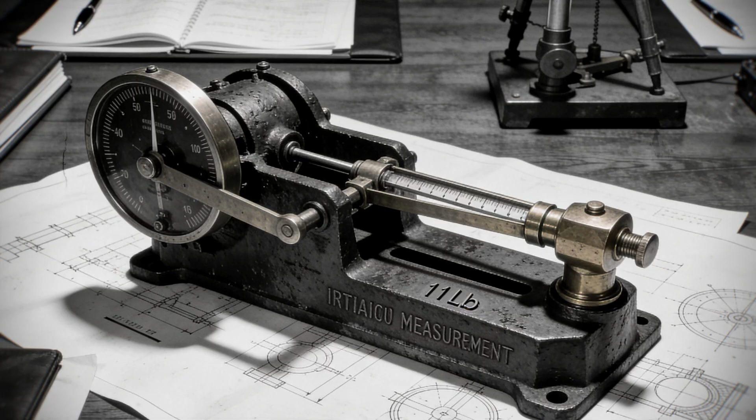The calculation method he presented that day is now codified in the irrigation standards of 14 countries and is taught in every major agricultural engineering program in the world. The device that proved it worked weighed 11 pounds and was made of cast iron and brass.

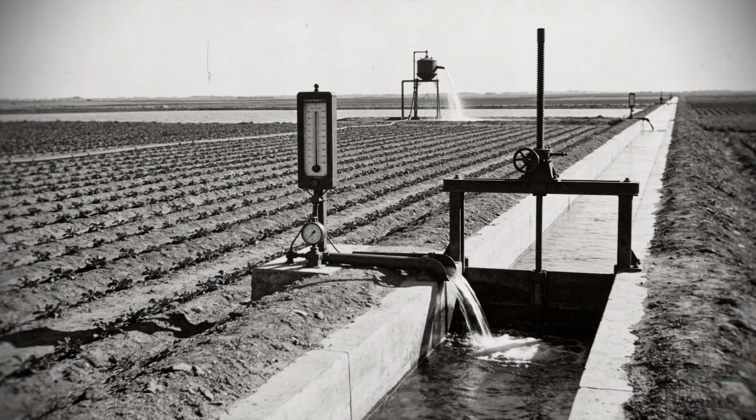Before you can understand why Samuel Rothwell was laughed out of that conference room, you need to understand what irrigation engineers were measuring in 1934 and why every single method they were using was wrong in exactly the same way.

In 1934, gravity-fed irrigation was the primary method of watering large-scale agricultural land across Australia, parts of North America, India, Egypt, and southern Europe. Water flowed from elevated sources through channels and ditches to fields. The engineering challenge was calculating how much water was actually reaching the crops.

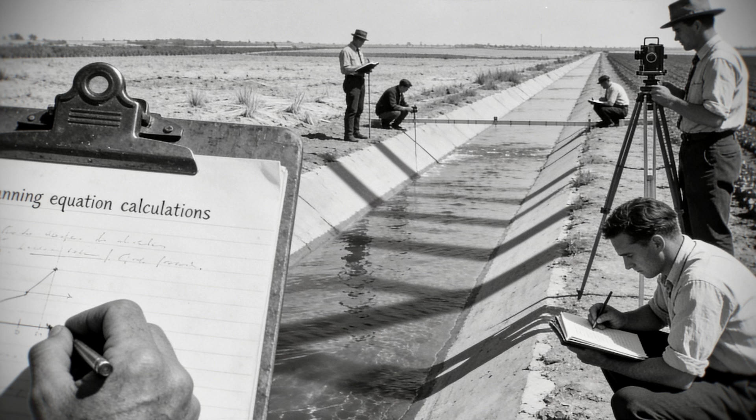Farmers paid for water by volume. Governments needed to know consumption rates to manage reservoir levels. Engineers needed flow data to design new systems. Every calculation depended on knowing the volumetric flow rate through the channels. Get that number wrong and you either flooded fields or starved them. You either overcharged farmers or bankrupted the water authority.

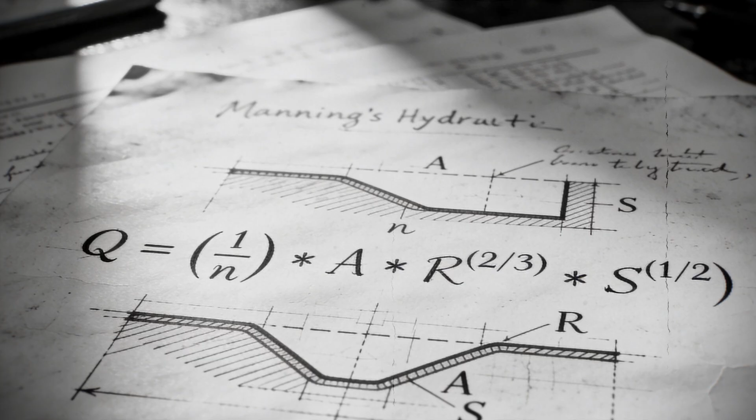The standard method in 1934 was the Manning equation. It had been published in 1889 by Irish engineer Robert Manning. It calculated flow based on channel slope, cross-sectional area, and a roughness coefficient for the channel material.

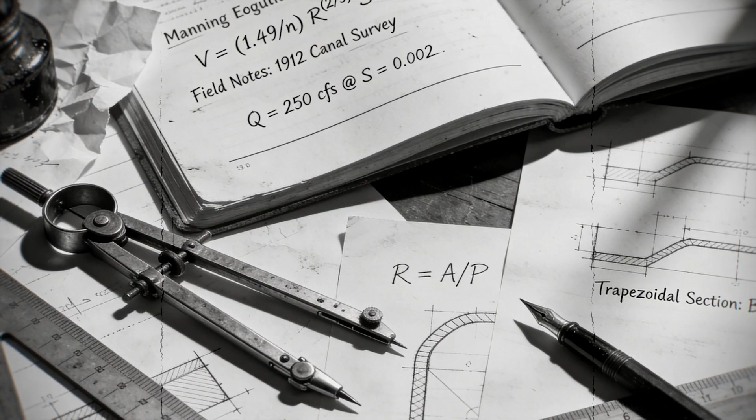The formula was Q equals 1 over N times A times R to the 2/3 power times S to the 1/2 power. Q was flow rate, N was the roughness coefficient, A was cross-sectional area, R was hydraulic radius, S was slope. Every irrigation engineer in the world used it. The formula was printed in every civil engineering handbook published between 1890 and 1940.

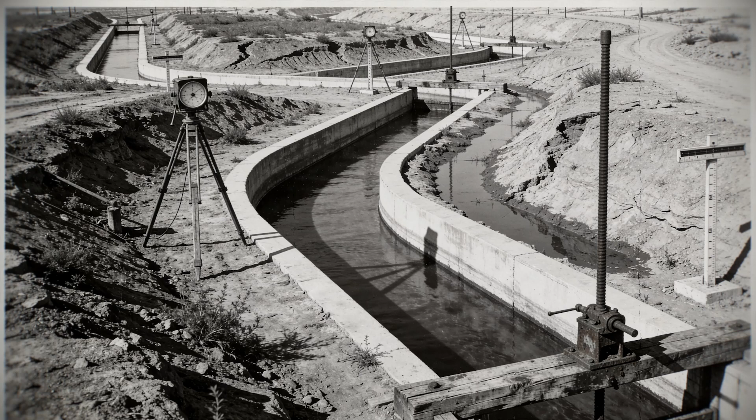The Manning equation had one problem. It was consistently wrong by 18 to 34% in field conditions. Not wrong because the math was bad, wrong because the assumptions it required could not exist in actual irrigation ditches.

Manning's equation assumed uniform flow. It assumed the channel had a consistent cross-section for the entire length being measured. It assumed the slope was constant. It assumed the roughness coefficient was uniform across the wetted surface. It assumed steady-state conditions with no fluctuation in upstream supply. None of those assumptions held in working irrigation systems.

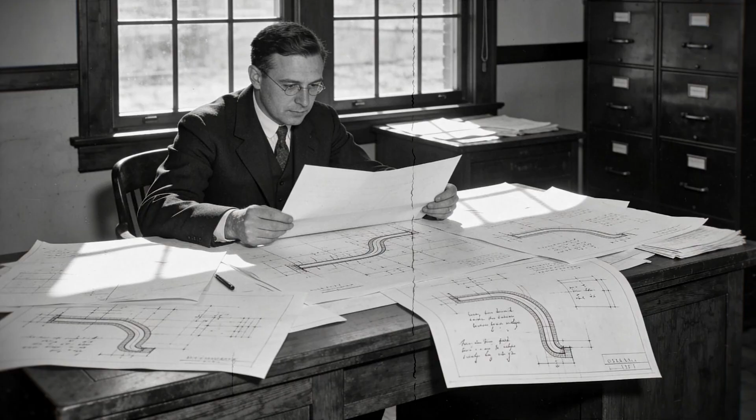Ditches were hand-dug or carved by early machinery. Their cross-sections varied every 20 feet. Slopes shifted wherever the land shifted. Channels accumulated silt in some sections and scoured clean in others. The roughness coefficient changed daily. Upstream flow fluctuated based on demand from other channels. Every single input Manning's equation required was a fiction in the field.

Engineers knew this. They published papers about it. In 1926, C. Ramser at the United States Department of Agriculture published a bulletin titled Flow of Water in Irrigation Channels. He documented measurement errors ranging from 21 to 39% when Manning's equation was applied to working ditches in California and Arizona. In 1929, A.N. Strahler published field data from Egypt showing errors between 15 and 41%.

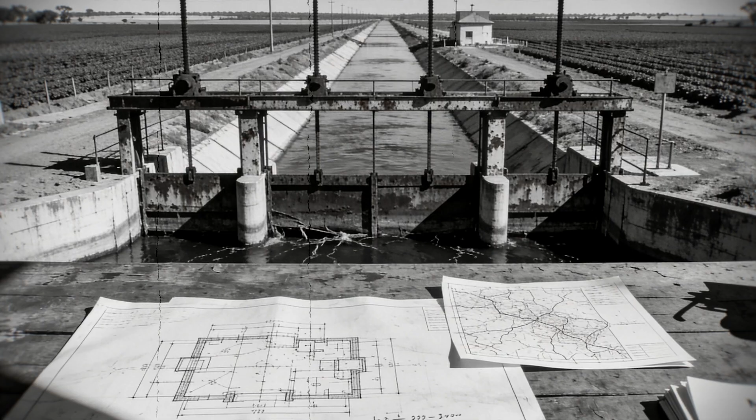In 1931, the Indian Irrigation Commission published a report documenting similar failures across the Punjab canal systems. Everyone knew the equation did not work. They kept using it because no one had an alternative. The consequences were not abstract.

In 1927, the Murrumbidgee Irrigation Area in New South Wales charged farmers for 43,800 acre-feet of water based on Manning calculations. The actual delivered volume, measured at the field level by farmers using their own methods, was later estimated at 31,200 acre-feet. The farmers paid for 12,600 acre-feet they never received. That is 4.1 billion gallons.

At the rate charged, the overbilling totaled 8,240 pounds. Adjusted for the number of farmers affected, the average family was overbilled 47 pounds. For context, the average annual income for a farm family in the Murrumbidgee district in 1927 was 280 pounds. The overbilling represented 16.7% of annual income. Families lost farms over it.

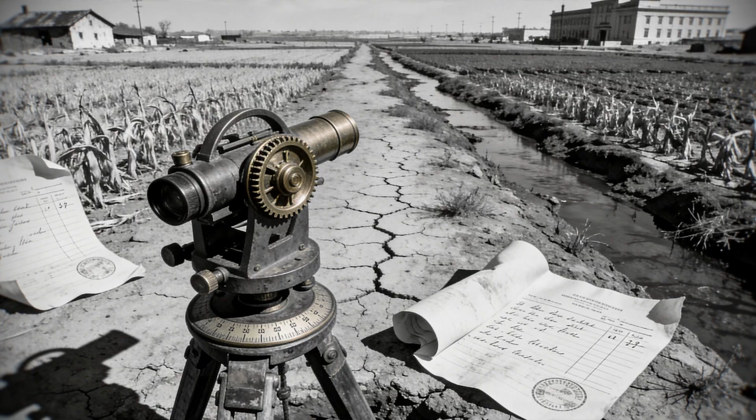In 1930, the West Punjab Canal District in India experienced the opposite problem. Engineers overestimated flow using Manning's equation and allocated water to more fields than the system could supply. During the dry season of 1930, 1,847 farms in the district received less than 60% of contracted water.

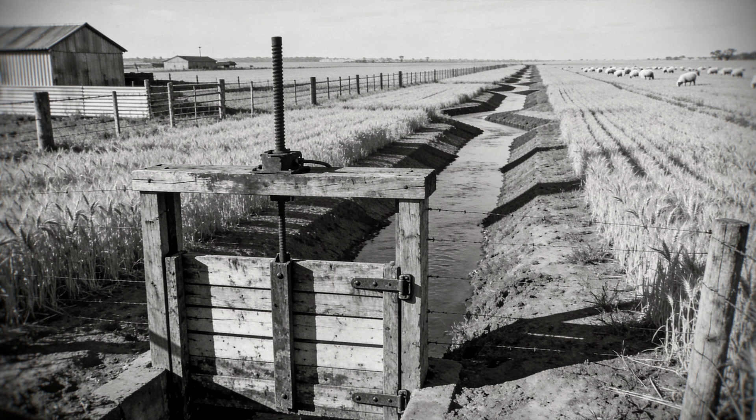Crop yields fell. 412 families defaulted on land revenue. The district administration filed 87 foreclosures. The error was systematic. The flow calculation was wrong at the source.

Samuel Rothwell did not start as an irrigation engineer. He started as a surveyor. He was born in 1893 in Deniliquin, New South Wales. His father, Thomas Rothwell, owned a 640-acre farm growing wheat and grazing sheep. The farm depended on water from the Deniboota irrigation scheme, which drew from the Edwards River.

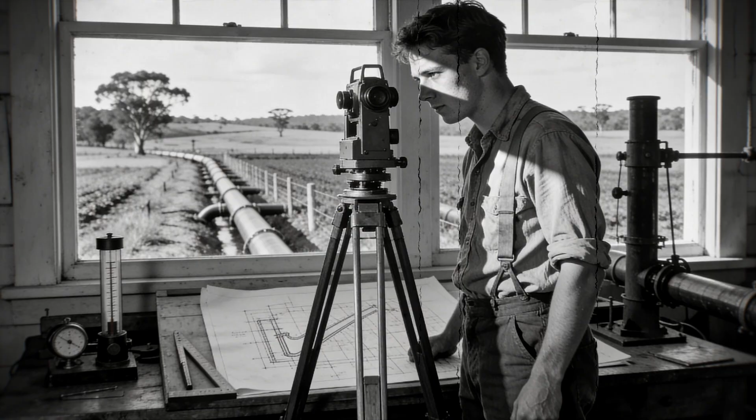In 1911, Thomas Rothwell was billed for 186 acre-feet of water. He had measured his own usage at the field gate using a simple weir box. His measurement said 141 acre-feet. He disputed the bill. The Water Authority refused to adjust. Thomas paid under protest. In 1912, the same thing happened. Billed for 193 acre-feet, measured 138.

Thomas died in 1914. The farm passed to his widow Margaret. She could not manage the land and the water disputes simultaneously. She sold the farm in 1916 for £1,840. The family had owned it since 1878. Samuel Rothwell was 23 years old when his mother lost the farm.

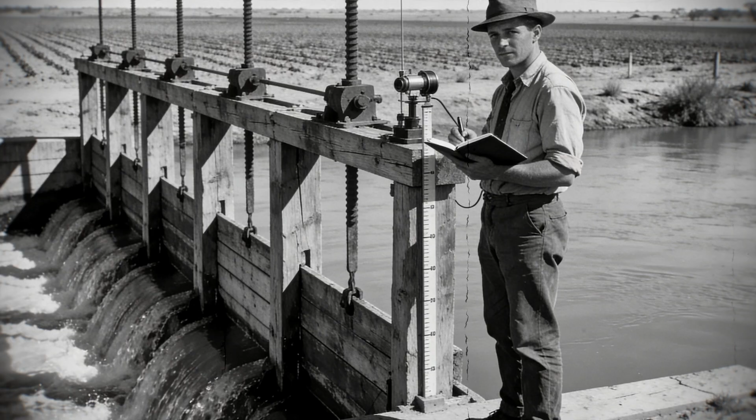He had been working as a survey assistant for the New South Wales Department of Public Works since 1912. In 1916, he requested transfer to the Irrigation Division. His supervisor noted in the personnel file that Rothwell had a personal interest in flow measurement accuracy. He was assigned to the Murray River District in 1917.

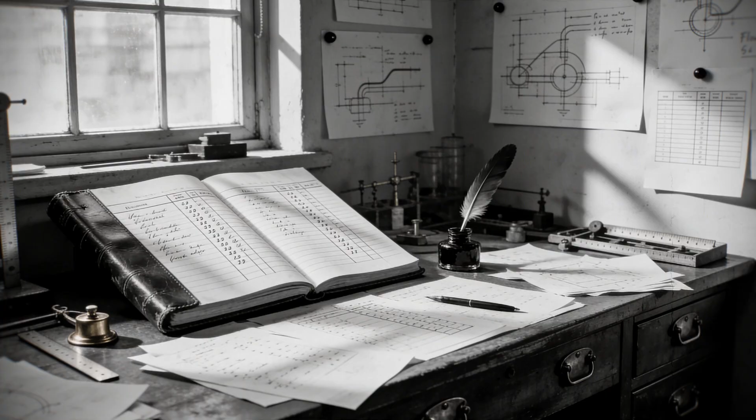Between 1917 and 1933, Samuel Rothwell measured water flow in irrigation channels across the Murray and Murrumbidgee systems. He used Manning's equation because that was the standard. He also used direct volumetric measurement at field gates when farmers requested verification. In every case where he could compare the Manning calculation to direct measurement, the Manning number was higher, not always by the same percentage but always higher.

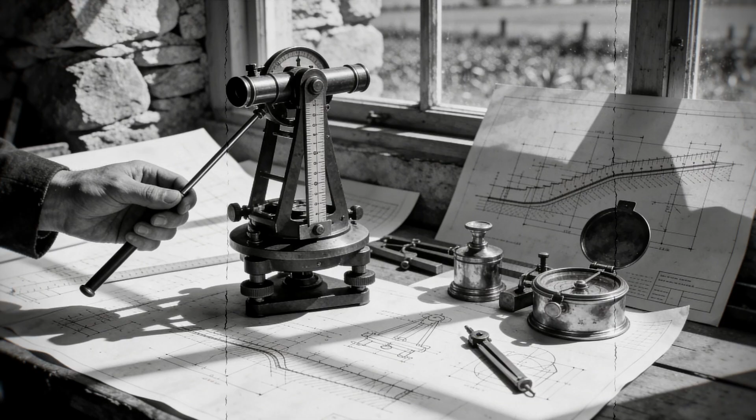Over 16 years he documented 247 comparisons. The average error was 23.6%. Manning's equation consistently overstated flow. In 1931, Rothwell began asking a different question. Manning's equation failed because the assumptions were wrong. What if you measured the thing that violated the assumptions? What if you stopped trying to calculate flow from channel geometry and measured the energy loss directly?

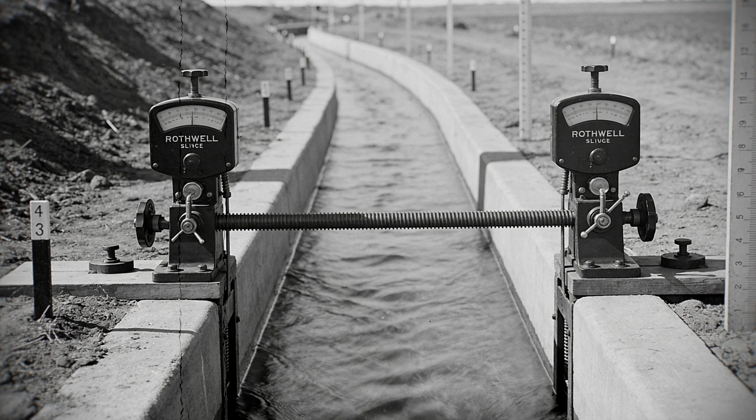Water flowing through a channel loses energy to friction. That energy loss shows up as a drop in water surface elevation. If you measure the elevation at 2 points and know the distance between them, you can calculate the energy loss. If you know the energy loss, you can calculate the flow rate without knowing anything about the channel cross-section, the roughness, or the slope. You only need two numbers, the elevation difference between 2 points and the distance between those points. This is not new physics, it is basic hydraulics.

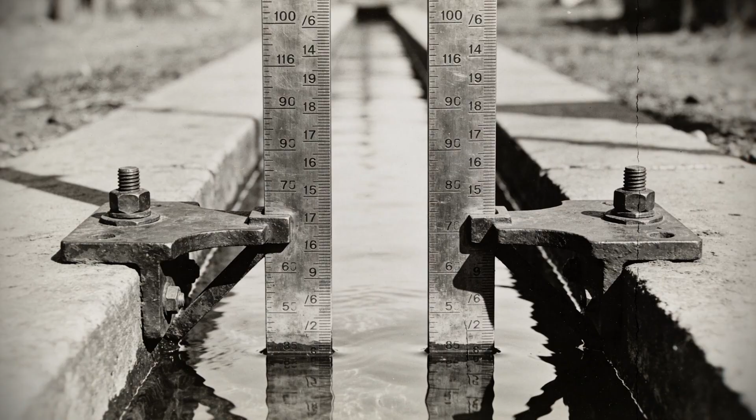Bernoulli published the principle in 1738. What Rothwell realized was that no one had applied it to irrigation channels because everyone assumed you could not measure elevation differences accurately enough in the field. The elevation drop in a working irrigation ditch over a short distance is small. In a channel moving 2 cubic feet per second over a 100-foot length, the elevation drop might be 0.4 inches. Existing surveying methods in 1931 could measure elevation to about 1-inch accuracy under field conditions. That was not precise enough.

Rothwell designed a device he called a paired sluice gauge. It was a set of 2 vertical staff gauges mounted in the channel bed exactly 100 feet apart. Each gauge was a brass rod marked in increments of 1/16 of an inch. The rods were mounted in cast iron bases that were anchored into the channel bottom using expanding bolts. The bases weighed 11 pounds each. The brass rods were 30 inches tall and weighed 14 ounces each. The entire paired set cost £4 and 6 shillings to manufacture.

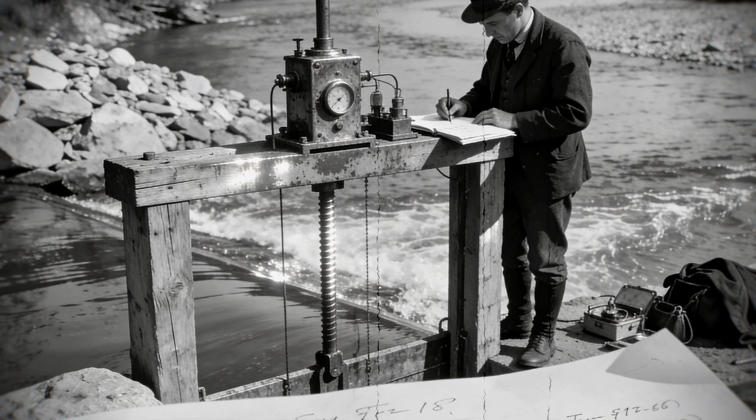The innovation was not the gauge itself. Staff gauges had existed for a century. The innovation was using 2 gauges at a fixed distance and calculating flow from the difference in readings. Rothwell called it the differential energy method. You read the water surface elevation at the upstream gauge. You read it at the downstream gauge. You subtracted. The difference was the head loss. You plugged the head loss and the distance into a formula Rothwell derived from the Darcy-Weisbach equation. The formula gave you flow rate.

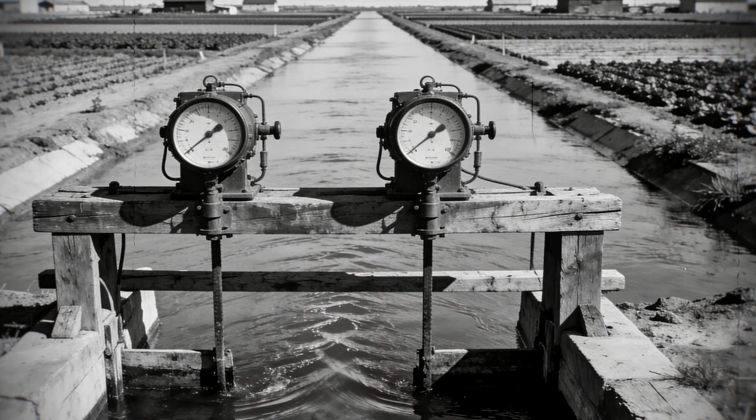You did not need to know the channel cross-section. You did not need to measure slope. You did not need to guess the roughness coefficient. You measured the consequence of all those factors combined, which was the energy loss, and you calculated backward to get flow.

Rothwell installed his first paired gauge set in March 1932 on a supply channel serving the Berriquin Irrigation District. The channel supplied water to 47 farms. The Water Authority had been billing based on Manning calculations. Rothwell installed the gauges and measured flow for 6 months. He compared his measurements to the Manning calculations. The Manning method said the channel was delivering an average of 4.7 cubic feet per second.

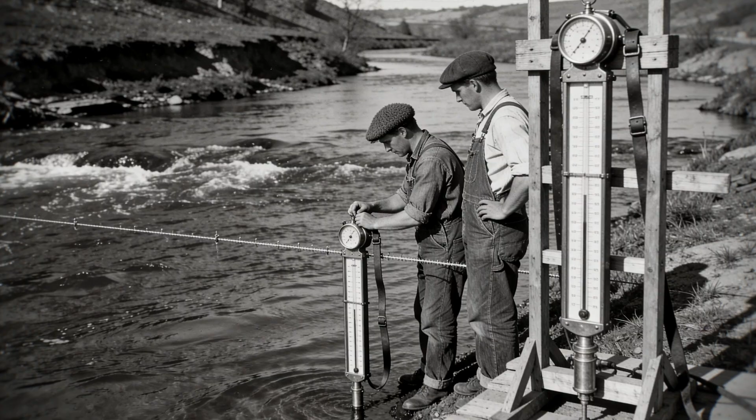Rothwell's differential method said 3.4 cubic feet per second. The farmers had been overbilled by 38%. The Water Authority did not believe him. They sent another engineer, Donald Frame, to verify.

Frame used a current meter which directly measures velocity at multiple points in the cross-section. You measure velocity, measure the cross-sectional area, multiply, and get flow. Current meter measurement is accurate but slow. It took Frame 4 hours to complete one measurement. Rothwell's paired gauge took 2 minutes. Frame's measurement, 3.5 cubic feet per second. Rothwell's method was accurate to within 3%.

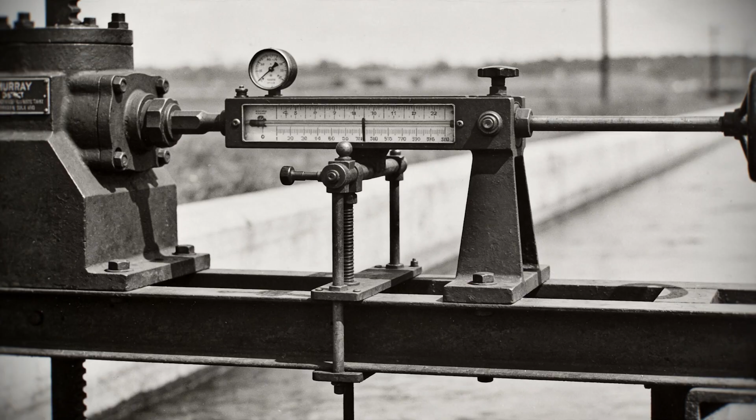Between 1932 and 1934, Rothwell installed paired sluice gauges on 19 channels across the Murray District. He published his results in the Internal Engineering Bulletin of the New South Wales Department of Public Works in December 1933. The report was 11 pages. It included methodology, installation instructions, cost comparisons, and accuracy data from all 19 installations.

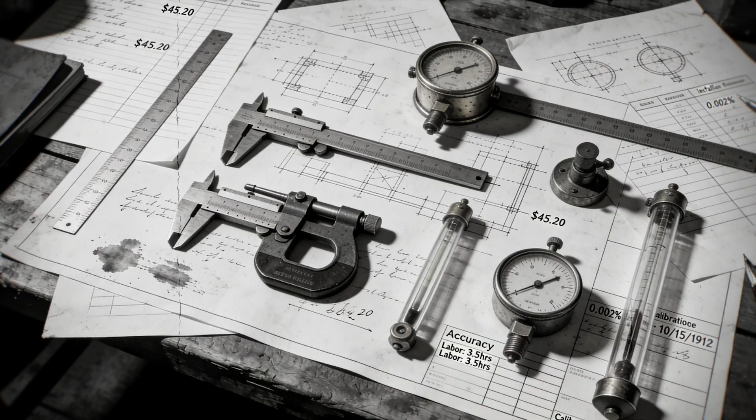The report concluded that the differential energy method was faster, cheaper, and more accurate than Manning calculations or current meter measurement. The cost per installation was £4 6 shillings. The time to take a reading was under 3 minutes. The accuracy compared to current meter measurement averaged 4.2% error. The report was read by engineers in the New South Wales Department. It was not read outside New South Wales.

In January 1934, the Commonwealth Agricultural Engineering Conference announced it would be held in Melbourne in April. The conference was organized by the Council for Scientific and Industrial Research, the predecessor to CSIRO. The purpose was to share research on agricultural water management across British Commonwealth nations. Delegates were invited from Australia, New Zealand, India, South Africa, Southern Rhodesia, Kenya, Canada, and the United Kingdom. The conference organizers invited submissions on irrigation efficiency, soil moisture measurement, and drainage engineering.

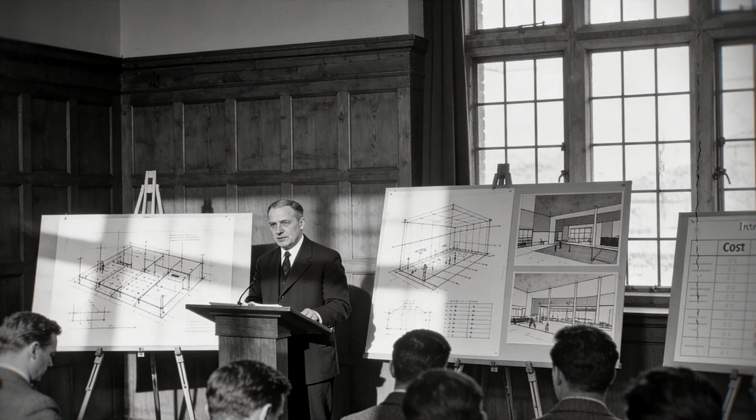Samuel Rothwell submitted his paper on the paired sluice gauge method in February 1934. The submission was accepted. He was assigned to Session 4, Agricultural Water Measurement, on the second day of the conference. He prepared a 20-minute presentation. He brought installation drawings, cost data, and accuracy comparisons. He did not bring a physical gauge. He later told a colleague he assumed the method would be evaluated on the data, not the device.

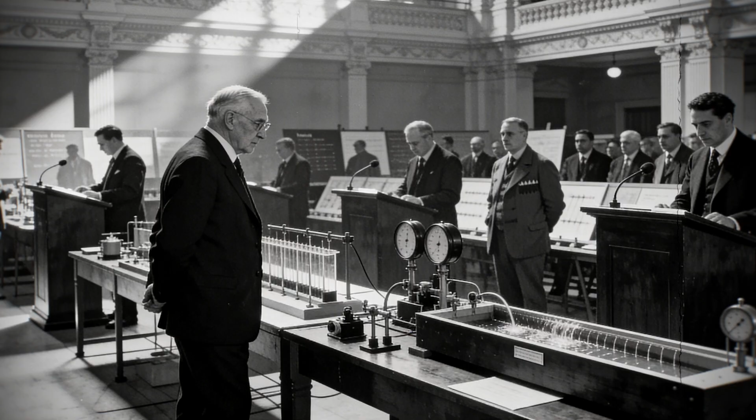The conference began on April 11, 1934. Session 4 started at 1:00 p.m. on April 12. There were 14 presentations scheduled. Rothwell was number 11. The session chair was Sir William Hudson, who was the chief engineer of the New South Wales Department of Public Works and would later become the chief engineer of the Snowy Mountains Scheme. Hudson was 52 years old. He had degrees from University of Sydney and had studied under Osborne Reynolds at Manchester. He was the most senior irrigation engineer in Australia.

The first 10 presentations in Session 4 covered Manning equation refinements, current meter calibration, flume design, and sediment transport. Presenters came from universities and government departments in India, South Africa, and Australia. Every presentation assumed Manning's equation was the foundation. The discussions were about improving input accuracy, not replacing the method.

Samuel Rothwell stood up at 2:43 p.m. He was introduced by Hudson as an engineer from the Murray District presenting on flow measurement. Rothwell began by describing the paired sluice gauge installation. He explained the differential energy principle. He presented his accuracy data. Then he said that Manning's equation should be abandoned for irrigation billing purposes because it was systematically inaccurate and his method was faster and cheaper.

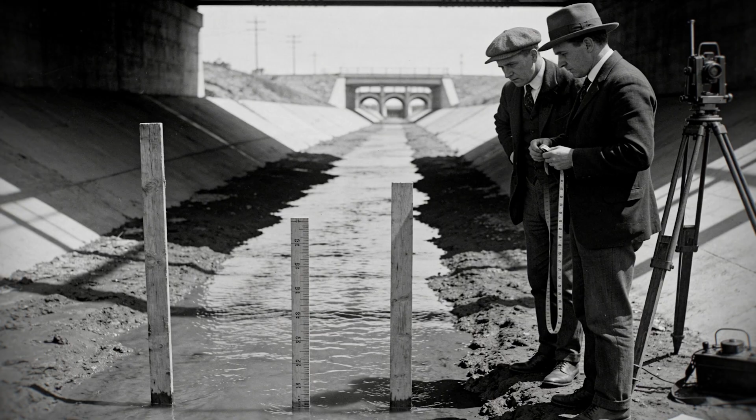The room went silent for approximately 5 seconds. Then someone in the third row laughed. Then others joined. Rothwell stopped talking. Hudson asked if Rothwell was seriously suggesting that 45 years of irrigation engineering based on Manning's work should be discarded in favor of 2 sticks in the mud measured with a tape. Rothwell said yes, if the 2 sticks gave the right answer and Manning did not.

Hudson asked if Rothwell understood that his method ignored channel geometry entirely. Rothwell said that was the point. Channel geometry could not be measured accurately enough to matter, so stop measuring it, measure the result instead.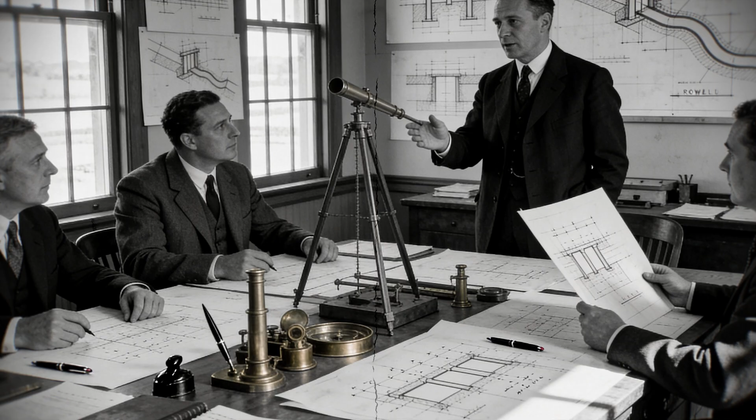A delegate from the Indian Irrigation Service, whose name was recorded in the minutes as Mr. S.L. Malhotra, asked how Rothwell proposed to calculate flow in channels where sluice gates or other structures created backwater effects that invalidated the assumption of uniform energy gradient. Rothwell said you install the gauges far enough away from structures that the flow stabilizes. Malhotra said that could be hundreds of feet.

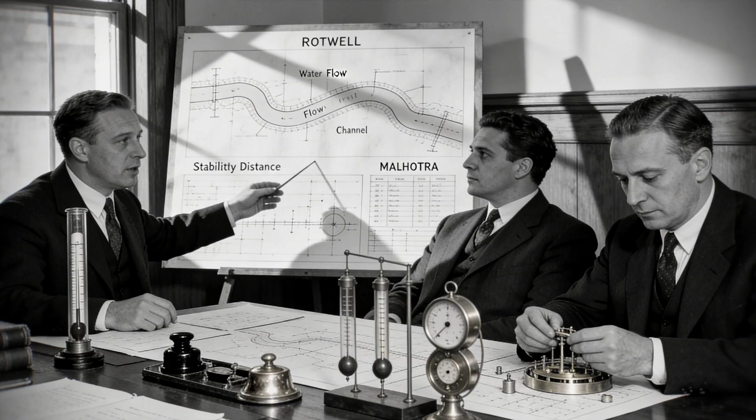Rothwell said yes, and it still takes less time than a current meter survey. Malhotra shook his head. Another delegate, Dr. Peter Caulfield from the South African Department of Water Affairs, asked whether Rothwell had tested his method in channels with high sediment load where bed elevation changes daily. Rothwell said he had not. Caulfield said the method was useless in half the irrigation systems in the world then.

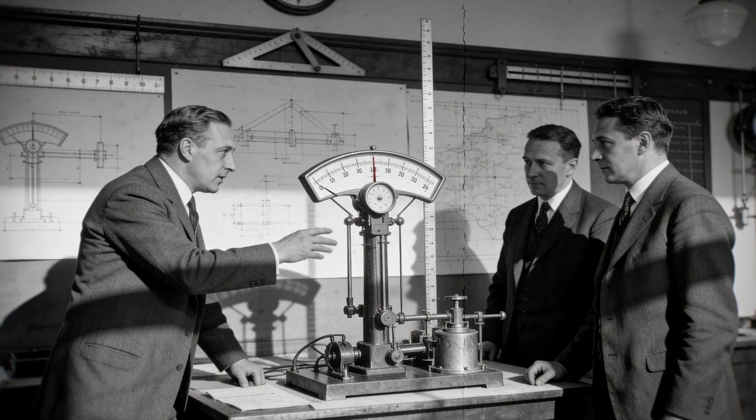Rothwell said the gauge bases could be re-leveled if bed elevation changed, and you would know it changed because the downstream gauge would read higher than expected. Caulfield said that was impractical. Hudson thanked Rothwell and called the next speaker. Rothwell sat down. His presentation had lasted 6 minutes.

The conference minutes, which were published in August 1934 by the Council for Scientific and Industrial Research, include a one-sentence summary of Rothwell's paper. Mr. S. J. Rothwell presented an alternative method for channel flow measurement based on differential head loss. The summary does not mention accuracy data, cost, or installation time. Rothwell's paper was not included in the full proceedings volume published in November 1934. Hudson later told a colleague that the editorial committee decided the method was insufficiently validated for international dissemination.

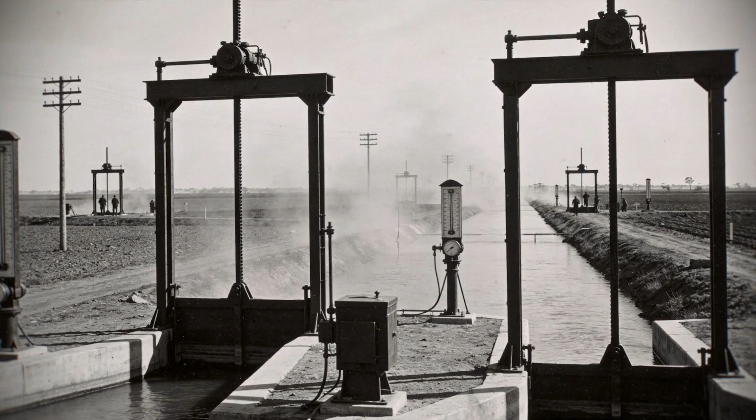Samuel Rothwell returned to the Murray District in April 1934 and continued installing paired sluice gauges. By the end of 1934, he had 41 installations across 7 irrigation districts. In 1935, the New South Wales Department of Public Works issued a memorandum to all district engineers stating that paired sluice gauges were approved for billing verification in disputed cases. The memorandum did not replace Manning's equation as the primary method. It created a 2-tier system. Manning was used for billing. Paired gauges were used when farmers challenged the bill.

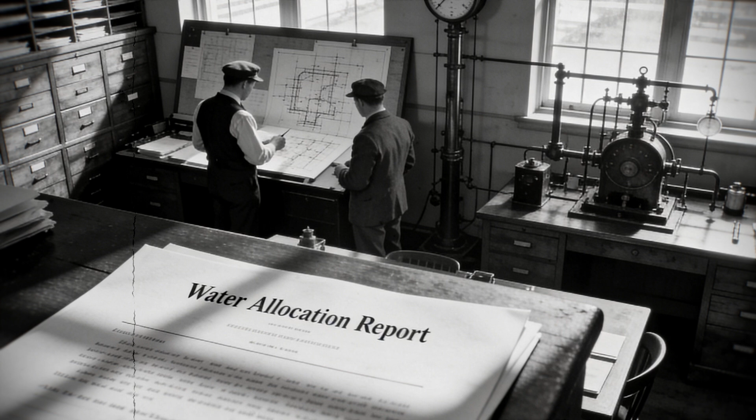This created a problem. Farmers now knew there was a more accurate method. Every time a paired gauge measurement came back lower than the Manning calculation, which it did in 73% of cases between 1935 and 1937, the farmer requested a billing adjustment. The Water Authority had to issue refunds. In 1936, the Murrumbidgee irrigation area issued 284 refunds, totaling £1,947. The refunds were calculated based on paired gauge measurements. The original bills had been calculated using Manning's equation. The financial impact was not sustainable.

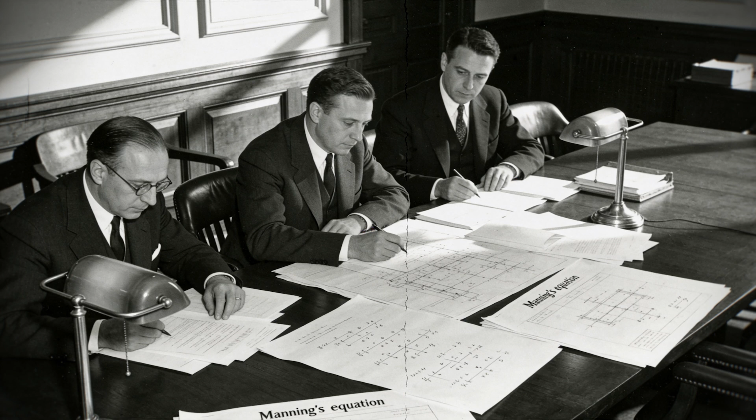In March 1937, the New South Wales Department of Public Works commissioned a review of flow measurement policy. The review was conducted by a 3-person committee: Sir William Hudson, who had chaired the 1934 conference session, Donald Frame, who had verified Rothwell's first installation in 1932, and Dr. Herbert Noon, a hydraulics professor from Sydney University who had not been at the 1934 conference. The committee was asked to determine whether paired sluice gauges should replace Manning's equation as the standard billing method.

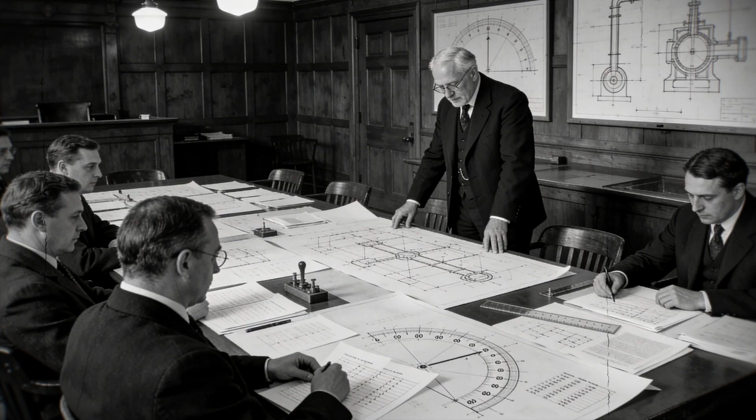The committee reviewed installation data from all 41 paired gauge sites. They reviewed accuracy comparisons. They reviewed cost data. They conducted independent current meter measurements at 6 sites and compared them to both Manning calculations and paired gauge readings. The current meter measurements took between 3 and 5 hours per site. The paired gauge readings took under 4 minutes. The current meter measurements agreed with the paired gauge readings to within 5% in 5 of the 6 cases. The Manning calculations were off by an average of 21%.

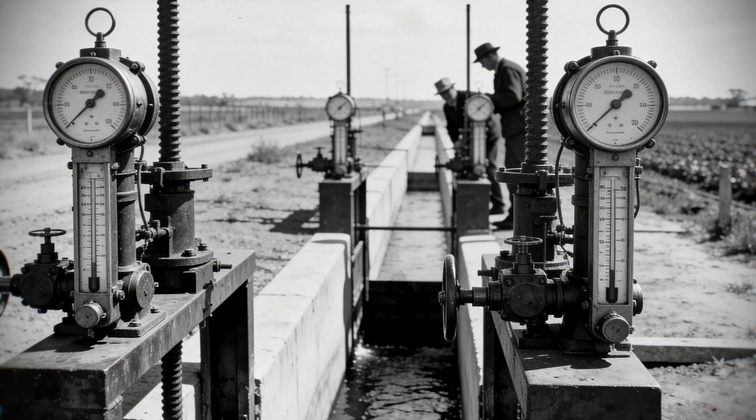The committee's report was submitted in September 1937. The report concluded that paired sluice gauges were more accurate than Manning calculations for billing purposes. The report recommended that Manning's equation continue to be used for system design and capacity planning, where absolute accuracy was less critical than relative consistency. For billing, where accuracy directly affected farm income, the report recommended adoption of the paired sluice gauge as the primary method. The report estimated the cost of installing paired gauges at all billing points in the New South Wales irrigation system at £4,780. The annual savings from eliminating disputed billing refunds was estimated at £2,100. Payback period, 2.3 years.

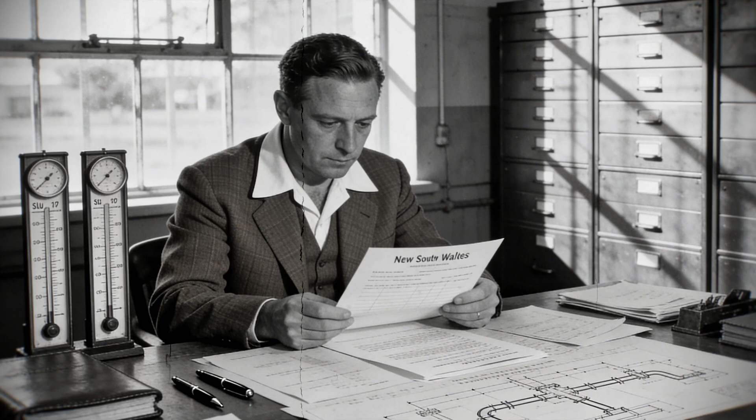In November 1937, the New South Wales Department of Public Works issued a directive that all irrigation billing after January 1, 1938, would be based on paired sluice gauge measurements. Manning's equation would remain in use for design purposes. The directive applied to all state-managed irrigation districts. Private irrigation companies were not required to comply, but were encouraged to adopt the method. Between 1938 and 1940, New South Wales installed 327 paired sluice gauge sets across its irrigation systems. The installations cost £4,890, slightly over the estimate. Billing disputes dropped by 81% in the first year. Farmer satisfaction surveys conducted in 1939 showed that 68% of respondents believed the new method was fairer than the previous system.

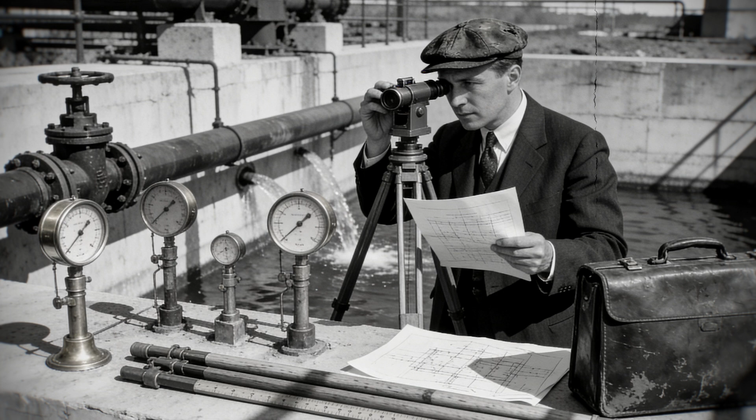In 1939, the Victorian State Rivers and Water Supply Commission sent an engineer named Colin Grant to inspect the New South Wales installations. Grant visited 9 sites, reviewed the installation procedure, and took independent measurements at 3 locations. He reported back that the method worked as described. Victoria began installing paired gauges in 1940. South Australia followed in 1941. Queensland installed its first set in 1943. Outside Australia, the method spread slowly. In 1940, the Indian Irrigation Research Institute in Punjab invited Rothwell to present his work.

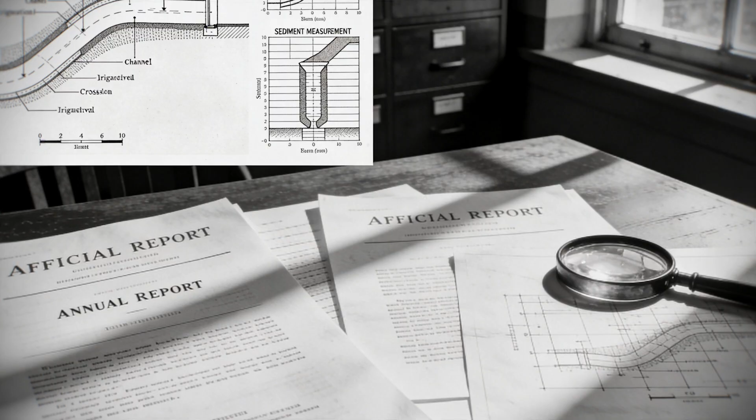Rothwell traveled to Lahore in March 1940 and spent 3 weeks training engineers on installation and reading procedures. The institute installed 12 paired gauge sets in the Sutlej Valley Canal system. The results were published in the institute's annual report in 1941. The report noted that the method was effective in channels with stable beds but required frequent releveling in channels with high sediment load, confirming the concern raised by Dr. Caulfield in 1934.

In 1946, after the war, the Food and Agriculture Organization of the United Nations held a conference in Washington, D.C., on global irrigation efficiency. Samuel Rothwell was not invited. His method was, though: an engineer from the New South Wales department, whose name was Alan Crawford, presented a paper on differential energy measurement using paired sluice gauges. The paper included 12 years of operational data from Australia and 4 years of data from India.

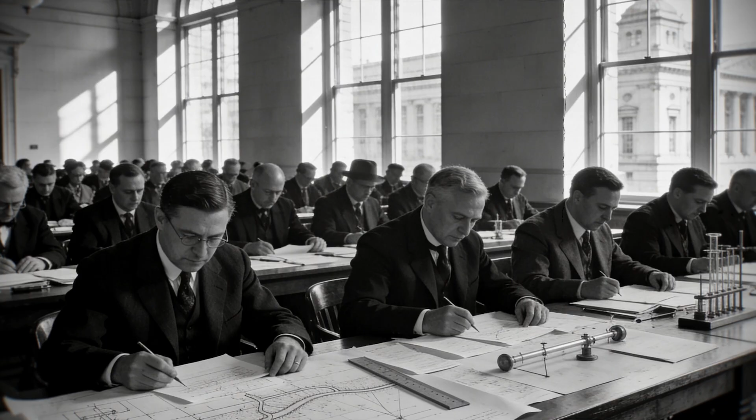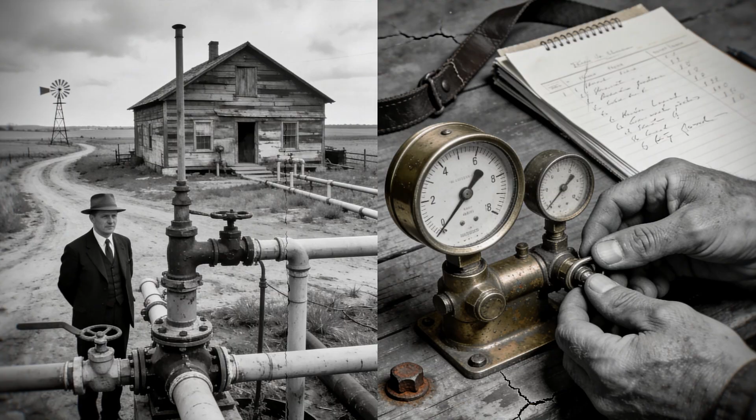The accuracy data was consistent across all installations. The method was more accurate than Manning calculations. The cost was lower than current meter surveys. The time required was a fraction of either alternative. The FAO conference proceedings, published in 1947, included Crawford's paper in full. The proceedings were distributed to member nations and translated into French and Spanish. By 1950, irrigation authorities in Egypt, Iraq, Cyprus, and Southern Rhodesia had adopted paired sluice gauge measurement for billing purposes. By 1960, the method was standard in 14 countries across 4 continents.

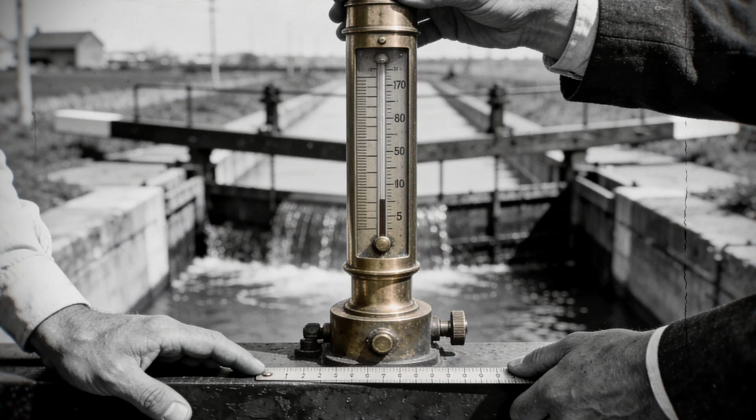The differential energy method was never patented. Rothwell never attempted to commercialize it. In 1952, an irrigation equipment manufacturer in Sydney approached Rothwell and asked if he would license the design. Rothwell said no. The manufacturer asked why. Rothwell said that his father had been overbilled for water he never received and lost the ability to contest it because no one believed the farmer's measurement over the engineer's calculation. He said he designed the method so that farmers and engineers would measure the same thing and get the same answer. He said charging money for that would miss the point.

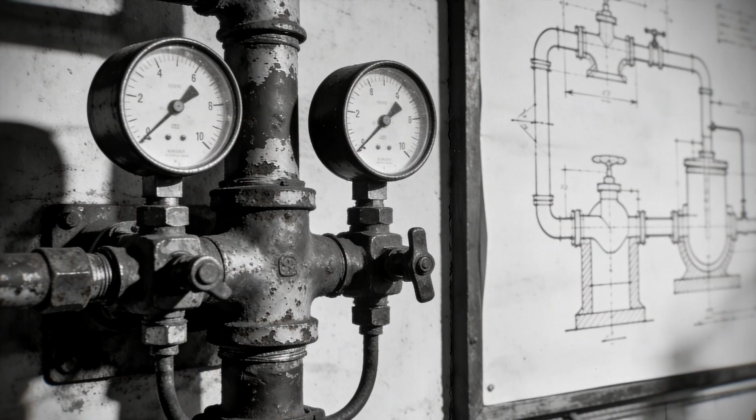The paired sluice gauge is still in use today. The modern version is called a differential pressure flow meter. Instead of brass staff gauges read by eye, it uses pressure transducers connected to digital data loggers. The principle is identical. Measure the head loss between 2 points. Calculate flow from the energy difference. The modern devices cost between $800 and $1,200 depending on data logging features. They are used in irrigation districts, municipal water systems, and industrial process control. The underlying equation is still the Darcy-Weisbach equation that Rothwell used in 1932. The innovation was not new math. It was applying old math to the thing that could actually be measured accurately in the field.

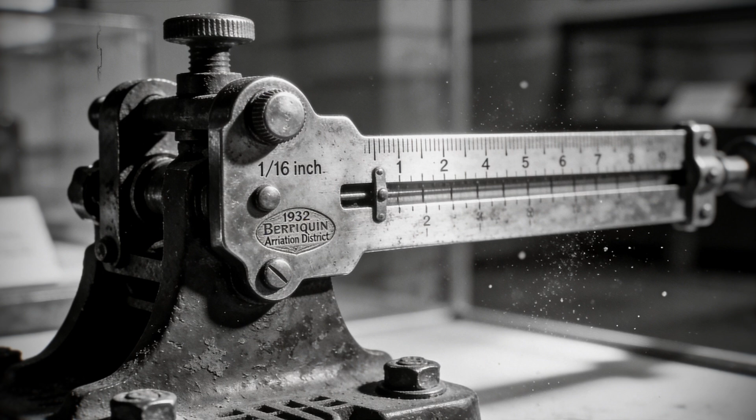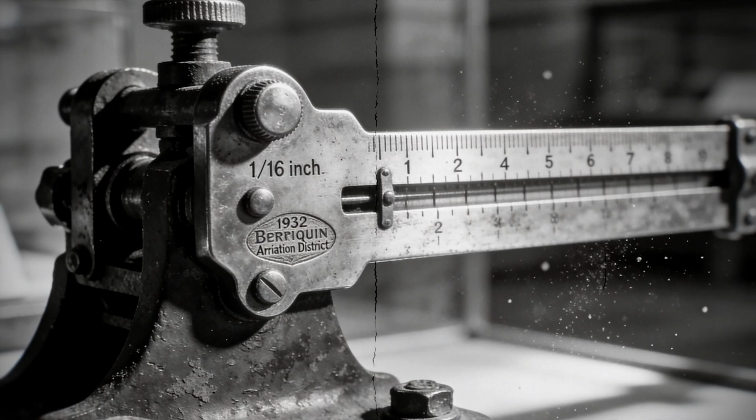Samuel Rothwell continued working for the New South Wales Department of Public Works until his retirement in 1958. He was promoted to senior engineer in 1945 and to chief irrigation engineer in 1951. He published 17 papers on irrigation measurement and channel design between 1934 and 1957. None of them received the attention that his 1934 conference presentation did, but none of them were laughed at either. He died in 1966 at the age of 73. His obituary in the Sydney Morning Herald was 4 sentences long. It mentioned his career with the Department of Public Works and his contributions to irrigation engineering. It did not mention the 1934 conference. It did not mention that he had been laughed at for being right.

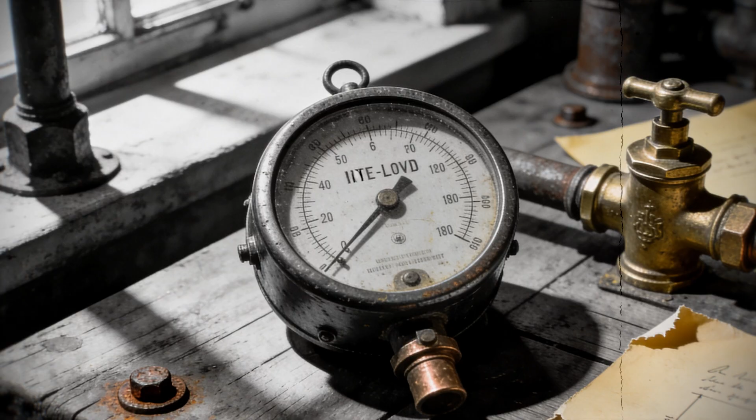The original paired sluice gauge from the Berpiquin Irrigation District installation in 1932 is in the collection of the Powerhouse Museum in Sydney. It is in storage, not on display. The brass rod is still marked in 16th-inch increments. The cast iron base still has the expansion bolts attached. It weighs 11 pounds. It is the thing that proved you could measure water more accurately by ignoring everything the experts thought mattered and measuring the one thing they thought did not.